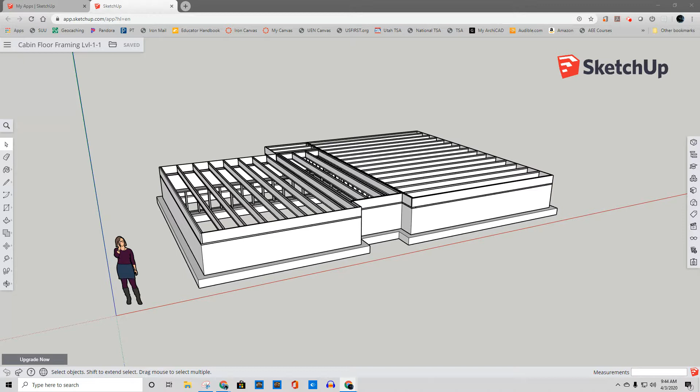So what I've done is a crawl space foundation. There's different kinds of foundations. The stem wall, for those of you that have not had CAD or architectural design before, is this portion I highlighted in blue. It is, in this case, a 4-foot stem wall. That gets us enough room for a crawl space underneath and to get below frost depth.

Now, there's certain building code requirements that go into this, to be discussed later. But what you need to know is that the wood right here above that blue line, there's a little piece called a mud sill. That mud sill is either pressure treated lumber or redwood in our area. Usually we use a lot of pressure treated around here.

That mud sill is literally there to separate the lumber from the dirt work. You've got to have at least 8 inches of clearance before you have any lumber, so we've got to go from the top of this down 8 inches. Then we'll have the dirt backfill against this, and that's our foundation in the ground.

And that foundation has to go deep enough into the ground that during the winter months when we get some frost, the frost doesn't get below it and cause heaving, which causes the ground to change depending on the water content and ends up breaking buildings.

You can see some examples of it in our area if you go looking around, but this is the framing of it. So we've got a footing we pour first. That's a monolithic pour. Basically what we do is we have the contractor come in and he puts down a 2-foot wide channel between some usually 2x10s or 2x12s, and then he pours concrete in it.

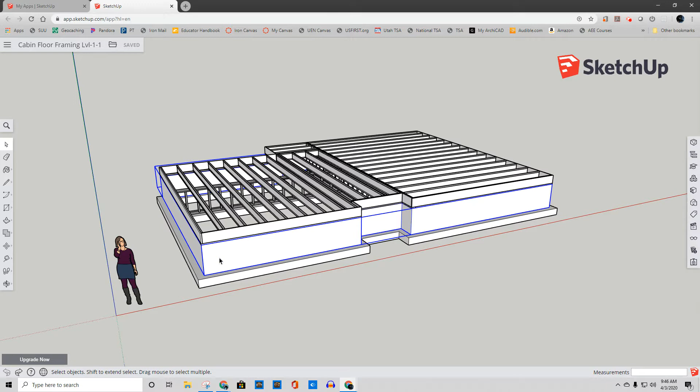So they pour this, let it cure, because concrete doesn't dry, it actually cures. Then they come back through and put the forms on top of that and pour the stem wall on top of it. The stem wall is typically between 8 and 10 inches thick. Usually around here we see a lot of 8 inches, some 9s. It's just normal concrete, usually like a 5 or 6 bag mix.

So they put that in, and then at the top of it, while it's still basically liquid, they come through and every 24 inches they put in a J-bolt. It's a 10-inch J-bolt with a 4-inch washer, and it's 1/2 inch in diameter.

They put the washer on, they crank the nut down to where they want it to sit in the concrete, and then they push it in and let the washer support it on the surface of the concrete until it cures. At that point, they undo that bolt, that nut, take the washer off, cut holes in that, and set this mud sill into it.

They drill holes in the mud sill, line up the bolt holes, put that on there, and then they bolt the mud sill down, and then everything gets nailed to the mud sill.

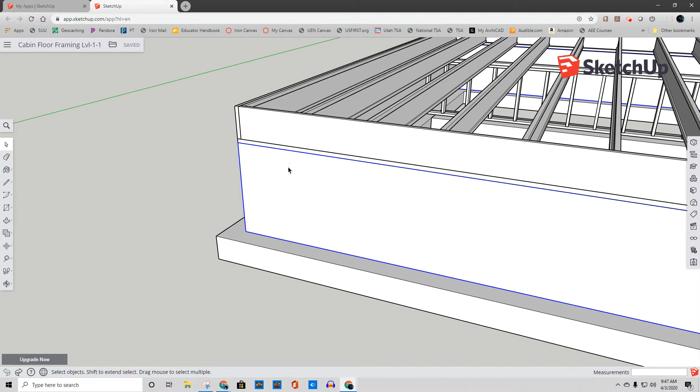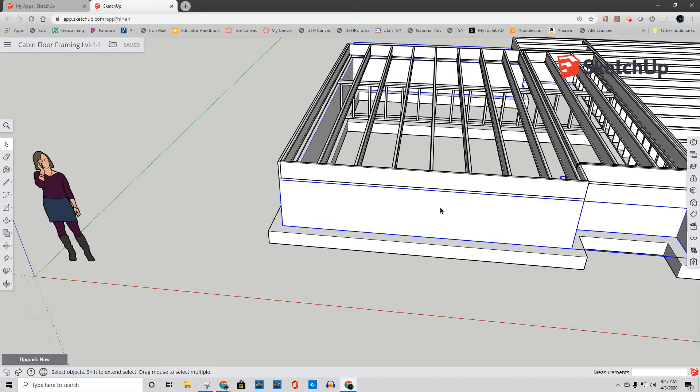Now, there's one other piece that I didn't draw in here because I was trying to decide how to depict it. At every corner of the building, we have a hurricane strap or tie. It's basically a big piece of metal that comes up, about 3 inches wide, and it goes into the concrete down here and ties into it, and then comes up and out and gets nailed to the sides of the building, the corners, so that the building is securely fastened to this foundation.

It can't be lifted off under any conditions really. If it comes off there, it's pretty catastrophic to the building.

Okay, now let's look at some other things. I put the rim joist in. A rim joist is the same height as a floor joist. The floor joists are these guys right here, and they are manufactured floor joists in this case.

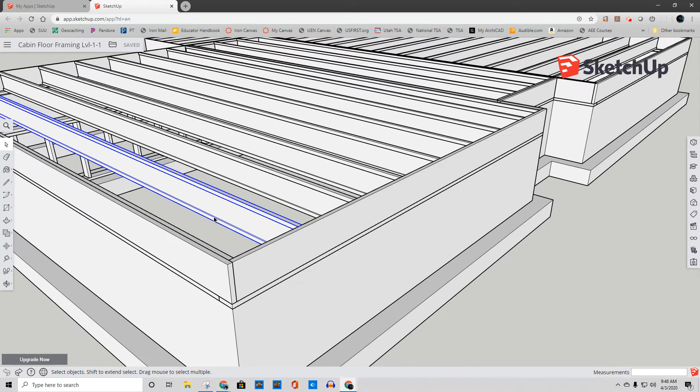They're basically wooden I-beams. If I could turn one, actually, let's see if I can lift one up. I'm going to move this guy up a little bit. Let's pick him, move him up. There we go. Come on, I want to go on the blue axis.

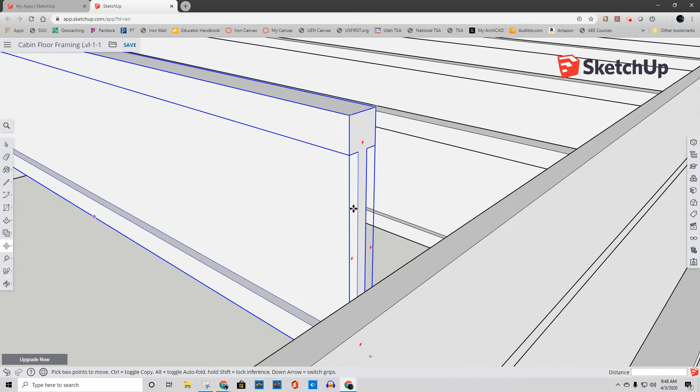There, we can look at the end of him right there. He's an I-beam, so what this is, is just usually a piece of wafer board, and this is some laminated veneer lumber. They're cut and strapped together, and shoved out in like 40-foot lengths. What that means is it's much more stable, much more even and consistent than natural dimensional lumber. There's very, very little variation by comparison.

So we put those in. Now, usually we look at the span table that goes with these. Span tables say 25 feet is the maximum span you can take. I don't like to go 25 feet. If I can do something earlier, I do.

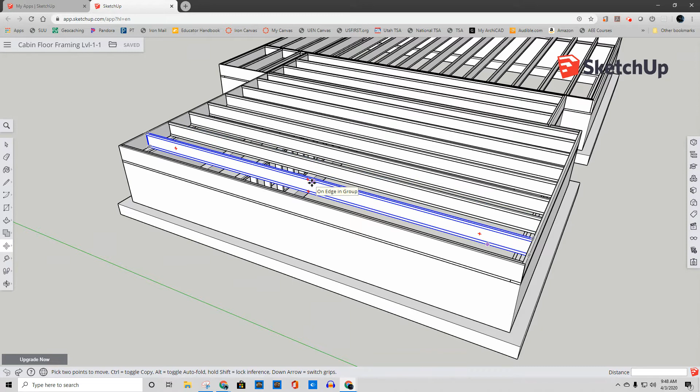I've actually framed this in a couple of awkward ways just to illustrate a couple of points I wanted to make. First off, this is a spread footing that goes through the foundation, part of the original footings. Then I put a wooden, basically bearing wall on it—just a short stub wall that holds up these joists. So that way they're bearing on the ends, and they're also bearing in the middle, which takes that sag out of it.

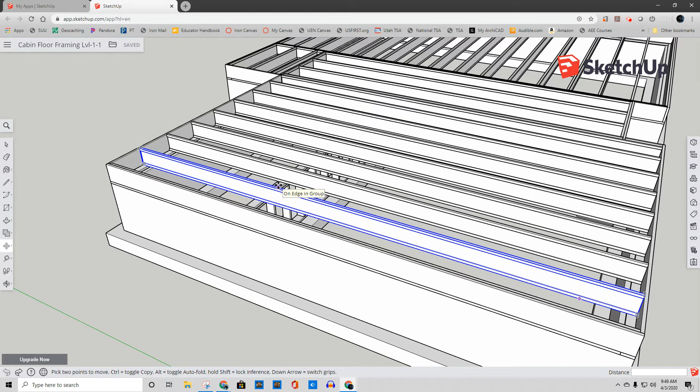If you're ever in a wooden framed house and you jump up and down on the floor, depending on your mass, sometimes you can actually feel the floor give a little bit, depending on the spans of the joists.

So as we're putting those in, we figure out how many we need and what spacing we need. Now spacing, like with other framing, gets changed around a little bit. This one fell right here, but I needed to make sure I had enough bearing on the ends, so I changed a couple things up, added a double there.

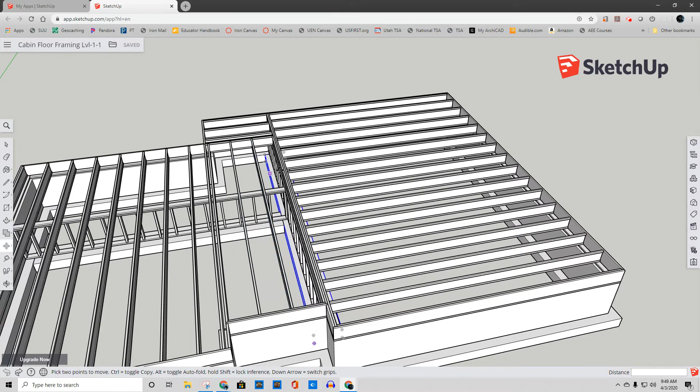There's actually a triple here that lines up with another stub wall, and then some T-bone into it. Reason being, I wanted to do a straight strand there and a straight strand there, so I only have a few oddballs to put in. But we do have to have enough bearing on the ends, so sometimes we have to double them up to make sure we get enough bearing.

That all gets done by a qualified engineer, or to the manufacturer's specs if the manufacturer has spec'd it out for the building, which means they've involved an engineer in it. They all know what's going on.

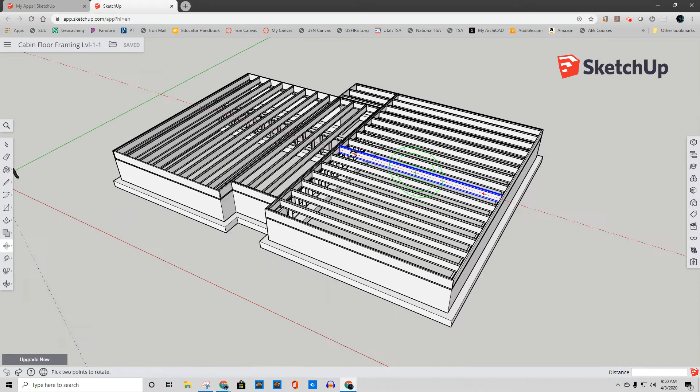Now, one thing I do want to point out here—these joists do have allowable cut tolerances. So the bathroom in this building goes right here. That means if I put plumbing in it, I've got a drain that's going to go down through here somewhere, and it's going to cut through some of these. So I want to make sure I don't cut through too many of them. I don't want to cause these to fail because I cut through them.

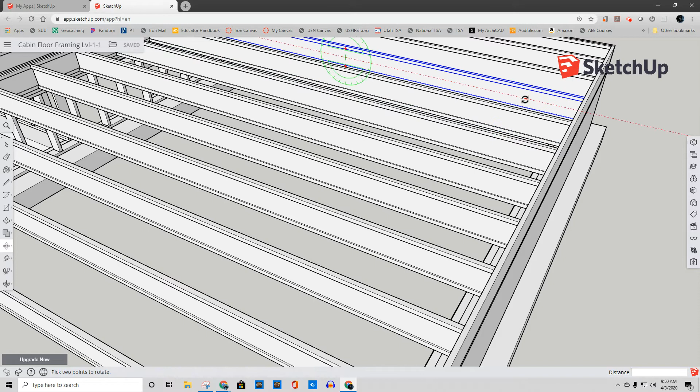So I drill a hole just big enough for the pipe and put it through, making sure it's at the right angles. Those kinds of things aren't difficult to do, but we want to minimize it. If I could do this a different way, I'd turn every one of these 90 degrees so they ran between them, with all the pipes running between them.

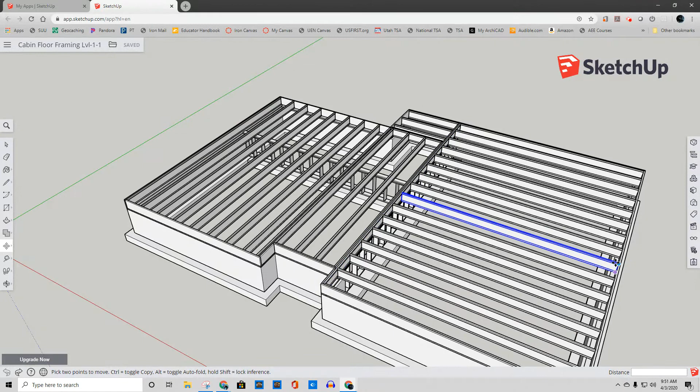My kitchen space over here is in the same boat. The problem is I don't have enough space this way. So in reality, if I was going to build this, I'd do some rethinking and probably rotate this end of the building 90 degrees for its framing, put a support wall right here and maybe another one here, then run these horizontal and continue a wall right across to the middle to support this. So that's some of the things we have to consider.

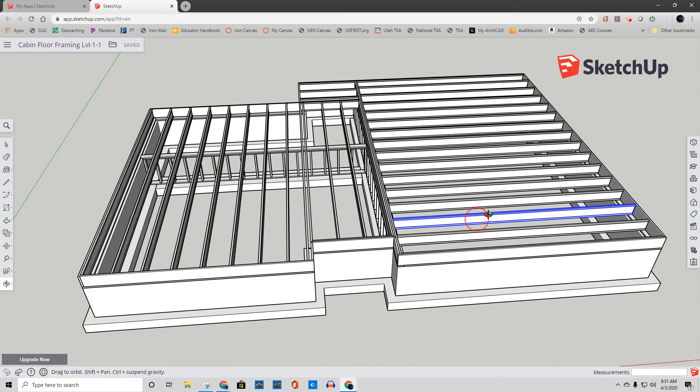There's other things, but basically I want to make sure I'm clear on what's going on in these pieces. You can see my footings and stem walls in place—that's pretty straightforward when you see it. It just gets detailed depending on what your bearing loads are. So that's the framing of our foundation in this case. It's just kind of a typical setup, not really detailed, and it hasn't been taken to an engineer to specify. It's just a general idea of what goes on down there.